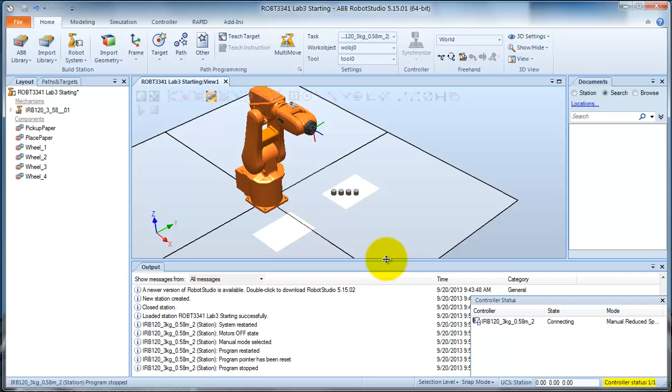We'll just have to wait a second here while it unpacks. And it's finished, we can close it. So here we have the station, got our controller status. We can close this one for now.

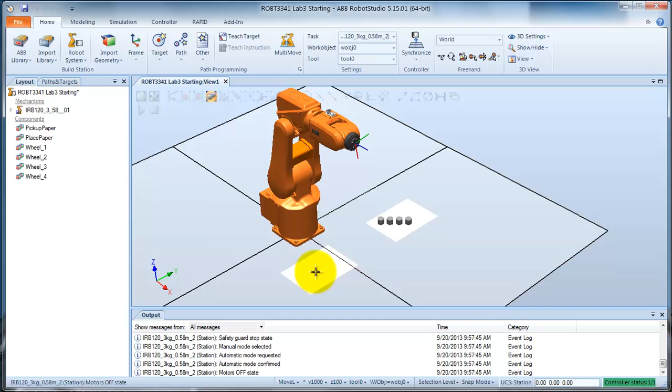And we've got two pieces of paper. They'll be supplied in the lab, 11 by 17 paper. On one, we're going to place the objects - these are the standard wheels or blocks that we're going to pick up. On the other one, we're going to pick them up from here, and then place them over here. They're in a linear pattern here, and we're going to place them in a circular pattern on this piece of paper. We're going to do a few things here.

We're going to start out by bringing in a gripper. So we have our gripper - I've defined a gripper for you already. So all you need to do is bring it in and attach it.

Then you'll create a couple of work objects. We're going to create one work object for this piece of paper for the pickup, and one work object over here for this piece of paper for the placement. After that, you'll create a few robot targets, and then you'll create a new program, and you'll write the rest of the program to perform the operations.

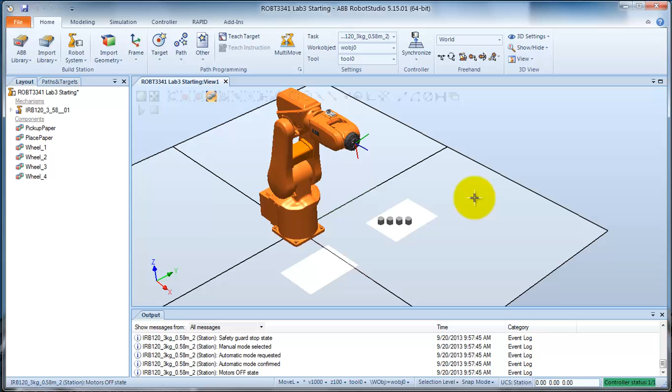We're also going to simulate the inputs and outputs, so I've created some simulated inputs and outputs for the gripper. We're going to start out by attaching, or opening and attaching, the gripper.

Notice all these tabs across here. We're going to be using several of them, mostly the Home tab. There's a second set of tabs here - there's a Layout tab and the Paths and Targets tab. We're going to be using both of those. We'll use the Simulation tab a little bit, the Controller tab a bit, and the Rapid tab a lot. So the Rapid and the Home tab are the main ones that we'll focus on in this lab.

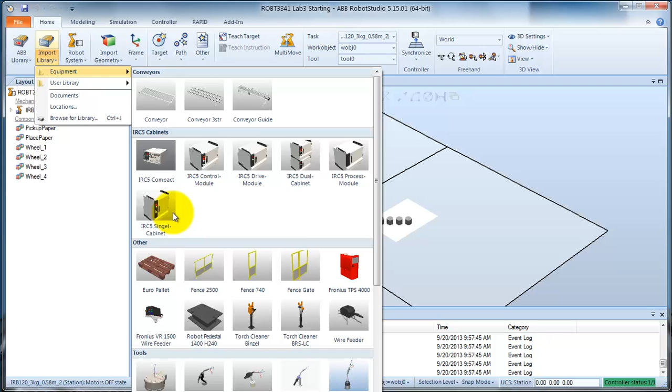Let's start out. I have created the gripper as a library component, so we come here and we'll browse for library. These are all the standard library components that come with RobotStudio, but I haven't placed mine in any of those folders - I've just given it to you. You've placed it in a folder. Find it - it's tgripper.rslib, so a RobotStudio library file.

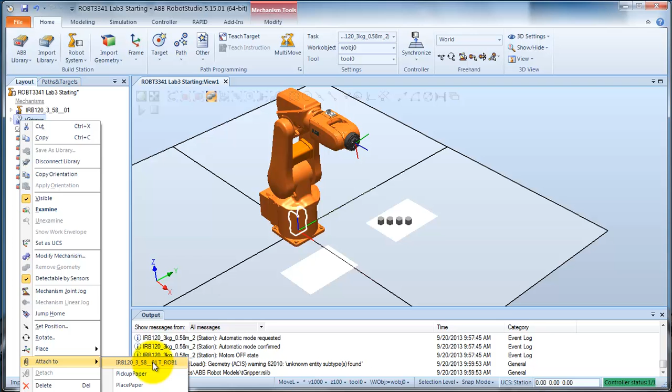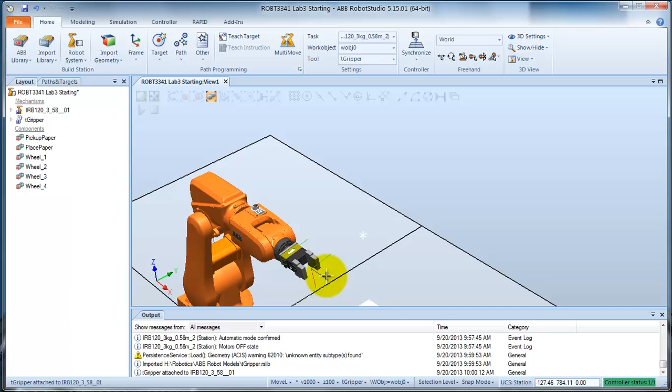Open that, and you probably can't see it because... there we go, it's hidden down there in the base of the robot. It comes in at its default position, but once we right click, attach to, we'll attach it to our robot, and we want to update the position - yes, and there we go. So now we have a Schunk gripper with gripper jaws that approximate our gripper, and the TCP is defined right at the end of the gripper jaws. Might not be the optimum place for it, we'll see later, but we can certainly work with that.

So after we have the gripper, then we're going to teach two work objects - like I said, one at the corner here of this paper and one at the corner over here on this piece of paper. There are several ways to create work objects. We don't really have to rotate them or do anything fancy here, so we can probably do it this way.

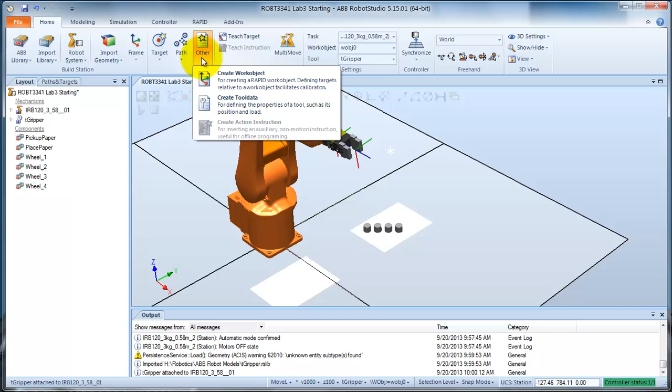We go to Other, Create Work Object, and we give it a name. So I'm going to call it WObj, let's see, Paper Pickup. And we'll make another one later called Paper Place. The user frame - so we'll change the user frame, we'll leave the object frame alone just like we did in the last lab.

So position and rotation, I'm just going to do the position. For values, if I click that, I have to enter the XYZ. Well, I don't know what the XYZ position is right now, so the easiest way for me to do it graphically is just snap to that corner.

So up here we have all the selections. I'm going to select surface selection because the white paper is a surface. Then I'm going to pick snap end for endpoints. After I've picked it, I can't just go and snap on the paper. I have to go and click back in the dialog box, so the cursor's in the dialog box.

Then I can go here, and you can see the dot appear there at the corner. It's snapping to the endpoint. So we'll snap at the endpoint. It gets the XY position. I can accept that. Now we've got our values in there, and I'll create the work object.

So we probably don't need to go back to this layout tab anymore. We can go to the paths and targets. Notice what's happened now. Under our task, we have tool data, T gripper. That's when I attach the gripper, then it attached that tool, and it defined that T gripper tool data as well.

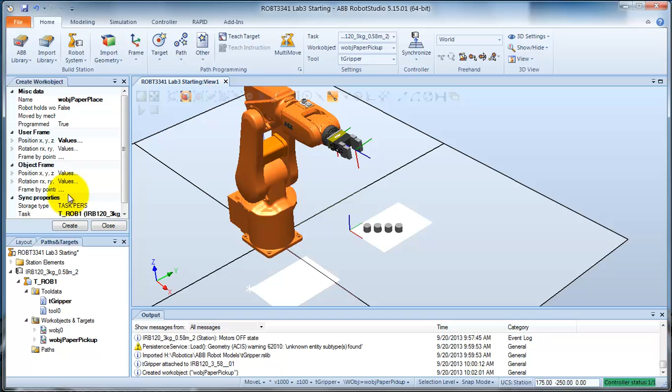So we've got our first work object. We want to create a second one here. We can do the same thing. Create work object, paper place, and click here, get our dialog box. We've still got the correct selection, so I just put my cursor in the dialog box, and I'm going to pick here. We'll accept that, create it, and now we have a work object paper place here.

Now we have to make sure that when we create points or targets later on that we have the correct work object and tool selected. So I'm going to start out by creating a target over here on this block. That's our first block that we're going to pick up. That's going to be with respect to work object paper pickup. So I better pick the correct work object here.

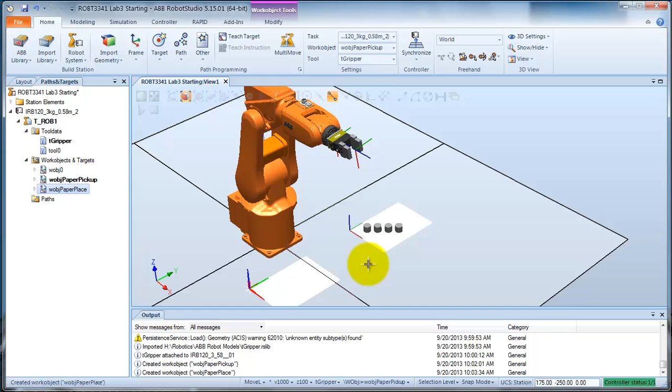All right, so let's go in here and create a target. And again, over here, we've got work object paper pickup. It's active. It's highlighted right now. So to create a target, we can create target, create a joint target, or create targets on edge. We won't be using those. Typically, the create target one is what we'll use here.

I've got on surface selection, I want to get the center of the block. So I'm going to pick snap center. Again, the focus is taken away from the position dialog, so I go click in here again, make sure the cursor's in there. And that's it. Point 1 has been added.

I can give it a name here, target name. Don't worry if you forget to do this, you can go and rename it in a minute. I'll show you how to do that. So we were using P for points, so we're going to go P first block, or you might come up with a better name.

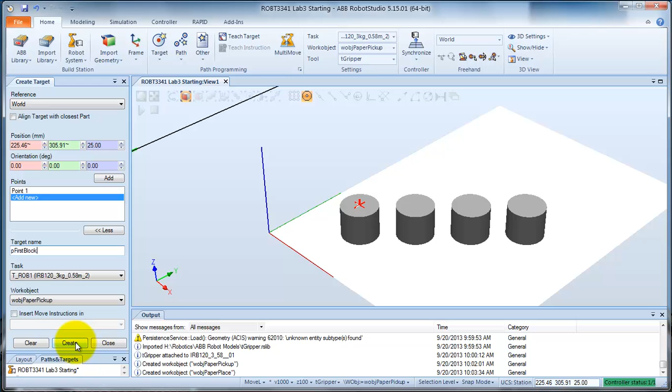We'll leave the orientation alone for a sec because I want to show you a few things about that. And we're just going to create that one. You can see I can create an insert move instruction immediately, so I can tell it create this target and a move instruction to this point, but we'll do that later on. So create that, close that, and let's see what we have here.

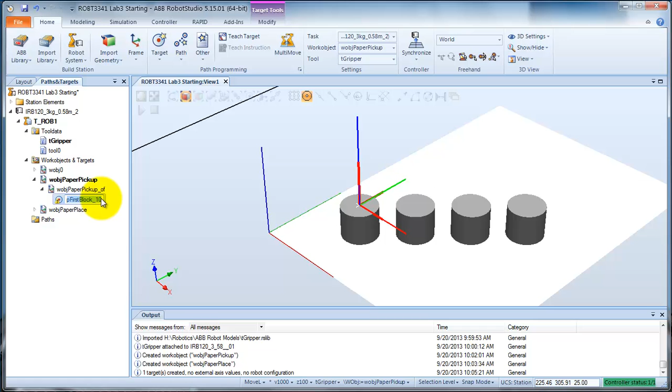We see here now we have P first block, and it puts an underscore 10 on it. We can rename that. In fact, I'm going to do that right now. Right click, rename, P first block.

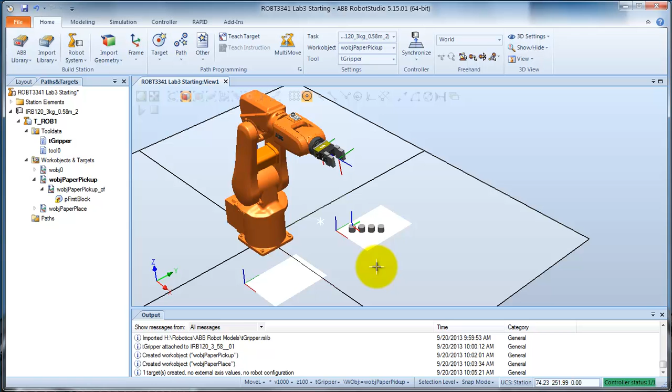So we've got a little warning here, the configuration is not verified. Because we're teaching it graphically rather than moving the robot to that location, it doesn't know what configuration the robot should have when it goes there. Remember, there are multiple configurations when we do the inverse kinematics.

We have to tell it which one to choose, meaning we have to give it a specific configuration. If I right click now and click on configurations, there are no valid configurations for that location. That means the robot cannot get there. Why not? Remember what happens when the robot moves to a location: it wants to align the tool axes with the target axes. There's no way it can align that z-axis with this z-axis because it would have to come up from underneath, and it can't get there.

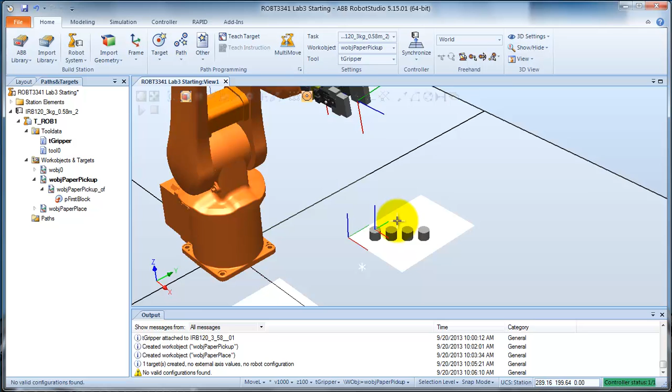So we need to rotate this target. We can rotate it about the x or y axes. Additionally, I'd like the gripper's green axis, the y axis, to point that way, so the gripper jaws are on either side of the part and we don't touch this part as we're picking up this one.

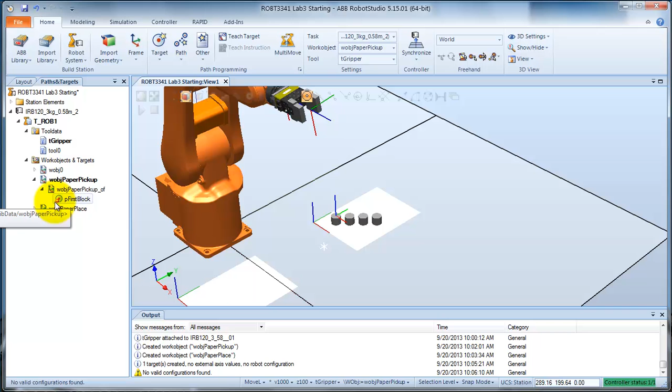Let's look at rotating this. I can right click, and notice we've got no configuration found here, we get this little red mark. So I'll go down to modify target, rotate, and notice we can move it, rotate it, place it using multiple points. I'm going to rotate first about the x-axis by 180 degrees and apply that.

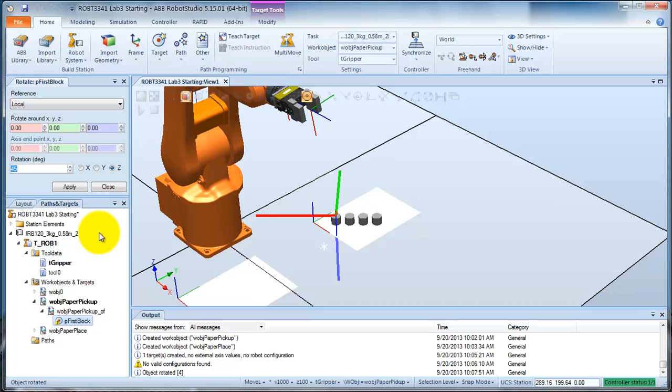Now the robot should be able to reach there. But I said I wanted this green y-axis to point out on an angle to match the angle of the blocks. So let's rotate about the z-axis, maybe 45 degrees at a time. No... no... and there we go, that's where I want it. So I can close that now.

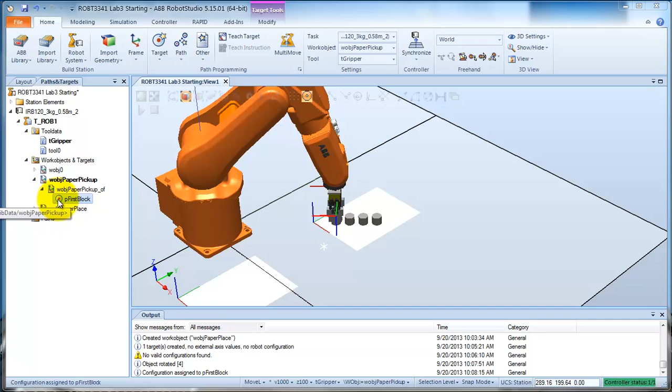Let's check the configuration now. Right click, configurations, and now we have one configuration only that's possible for that robot. Let's click on it and the robot will go there, and that looks fine. So if I apply that configuration, notice we're all fine, no errors. The robot can get there.

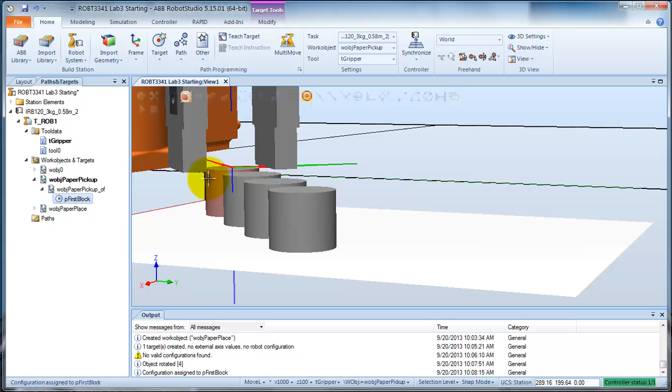Now you'll notice something else if I rotate around a little bit and zoom in: the TCP is now in line with the target. However, we're not far enough down. We could adjust this later in our program by just adjusting the Z value of the target, but we can do that here as well, graphically. So we want these jaws down a bit.

Let's say we want to move the target down about halfway here, maybe 12 to 15 millimeters, something like that. So let's move the target down. Right click, modify target, set position, and we want to go down in the positive Z direction, let's say 12 millimeters. And we'll apply that — you notice it's moved down.

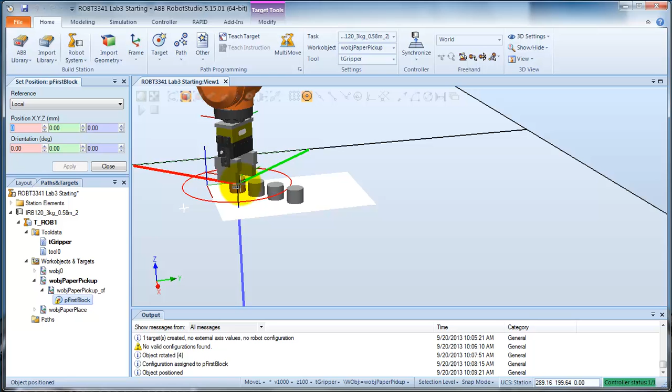And again we get the warning, so we have to right click, configurations. There we go. So anytime we move, rotate, or create a target, we have to make sure we select the correct configuration for the robot for that target. There are lots of tools you can use if you have multiple targets — you can copy the configuration so you don't have to do this for every single target.

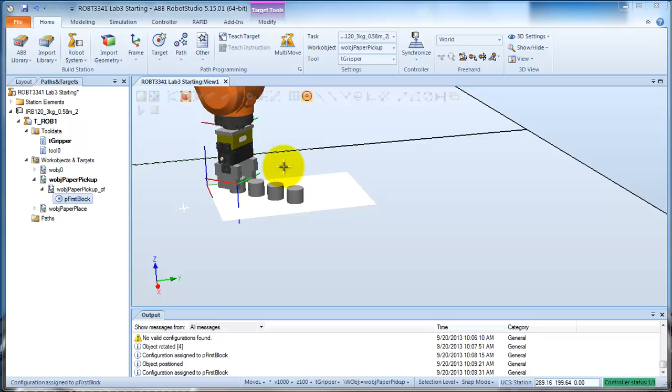So it looks like we've got a valid position now. What we can do is right click and add to new path. It creates path 10, which we can rename if we want. It puts a MoveL to pFirstBlock. That's not exactly what we'll want — we probably want an approach position ahead of that, and maybe a few other positions and things in there.

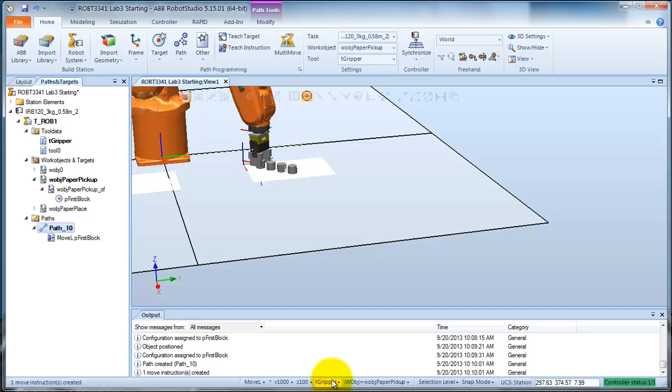But we can do all that later in our program. Notice it used a move L, and if I hover over it, it'll tell me the entire statement. It uses these settings at the bottom as the default, so if I wanted a joint interpolated move, I'd just pick move J from the list instead of move L. It also uses this work object and this gripper, which we can change here at the top under settings or down here on the status bar.

Let's just select another location — we'll call it kind of an intermediate point for the robot.

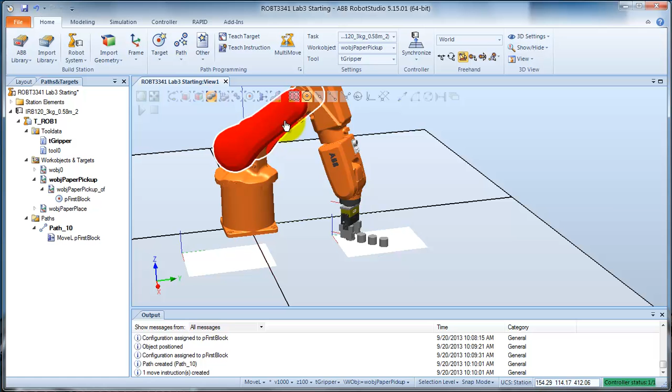And if I've got my robot, I can go in here. I can go to jog linear or I can go to jog joint, so I can grab individual joints of the robot. I can rotate it around. Maybe we'll zoom out a little bit.

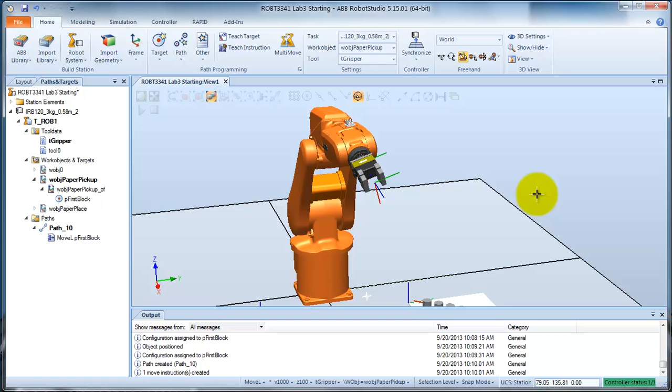Pull that one up, and somewhere there - we'll call that our intermediate point. So we'll pick, we'll come back to the intermediate point, and then we'll place, come back to the intermediate point, etc. So our robot's all in position here.

This one really isn't with respect to the object paper. I'm going to make it with respect to work object 0 instead. So if I move the paper around, this position doesn't really move.

And I can go and I can create a target, but the easiest way to do this one is probably teach target, or even teach instruction we can do. So you can see what it says for creating a move instruction and corresponding target at the current position of the robot. So let's do that.

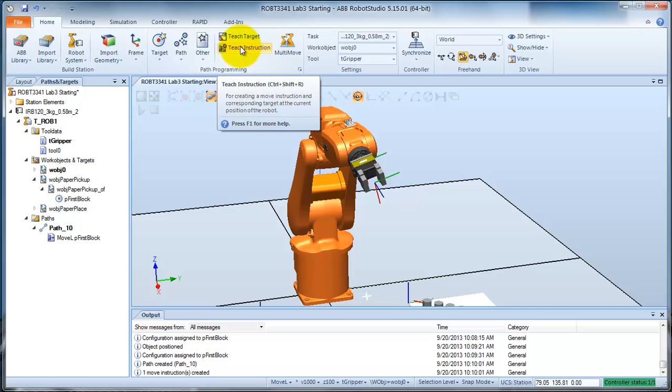It's giving me a little warning about work object 0. I'm okay with that. And you notice that it's put in move L target 10. So again, that's something we can go and change the name of later. In fact, I can do it right now.

We stored that one under work object 0. You notice that we have no configuration problems because I actually moved the robot there and said just teach where you're at with the current configuration. So I'll rename that and we'll call it a P intermediate. And you notice it renamed it automatically for us down here as well.

And I probably don't want to do a move L to it - I can change that later in my program quite easily. I can also do all sorts of things here and modify instruction. So instead of a motion type linear, I can go to a joint. I can change the speed here, the zone data. So let's say I'm going to go to a zone 20. Again, if you feel more comfortable, just type it in later on when you work with your program.

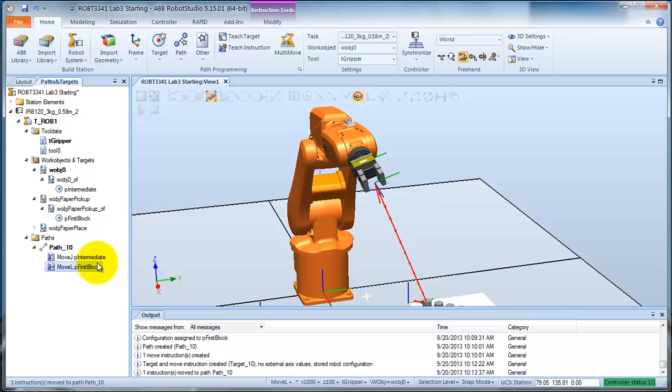So I apply that, I close it, and we've got a move J now. And we can move these around. So that one moves down to there. So I'm going to move to that one first, then down to there. And then I can copy that later when I write my program.

So once we're at this point, we've got a couple targets, we've got our work objects done, we've got some paths. And the reason I create those paths is I can't really copy these points over to my program unless I have them in a path.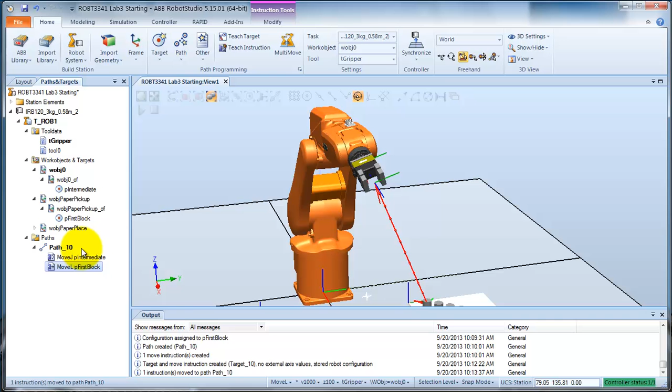So now I'm going to go over the Rapid tab. And there's many ways to create a new program. One way is to go under the task and we'll just right click and we'll click new module. I'll create a module and then inside that I'll create a main routine.

The other way you can do it if you want to try it this way is simulation setup. And I click entry point and I want a main procedure and I want to create it in - I've got my two existing system modules or my new module that I'm going to call Brent main module.

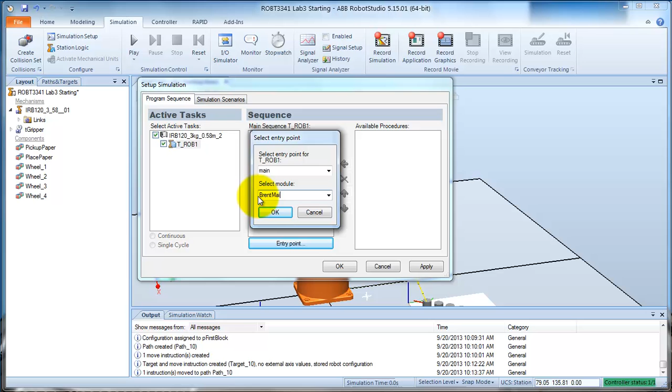And click OK. If we go to the Rapid tab, we'll see now I have a Brent main module. Double click on that and let's see what's in it. It should be empty, but it should have a main procedure already defined. So we're ready to go. We've got our proc main and we've got our main module.

Let's format that. There we go, that indents it nicely. So now I've got my empty program. And again, you can do this later if you want. It's just easier if you do it now because it helps you organize things so you don't have to reorganize them all later. Now on the synchronize button, we're going to synchronize to the virtual controller.

So all the work we had just done was in the station. Now we're going to synchronize to the virtual controller. This is going to send it to the virtual controller, which means that it's basically like the real robot, only it's the virtual robot and its controller.

It can be a little bit confusing until you get used to this sequence. It's asking where you want to store the gripper data, the work object data. It suggested making a new module called calib data for calibration data.

We say no, we don't want that. We want to put it in the Brent main module. If you want it all in your main module, you can do that. If you want it in the calibration module, that's a good place too. It keeps things organized. Where do you want path 10? Well, I'm going to put it in my main module.

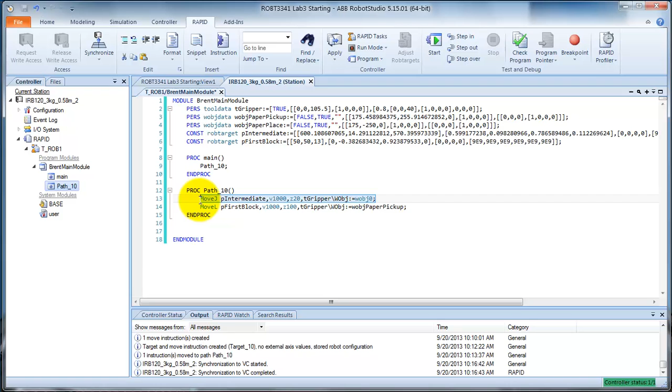What I'm going to do is Control C, Control V, take it back to intermediate afterwards. Of course, we'd probably want to put an approach point in here. Probably want to slow this down a little bit. This is probably going to be a fine. We want to use T gripper. Yes, yes. Everything else looks good.

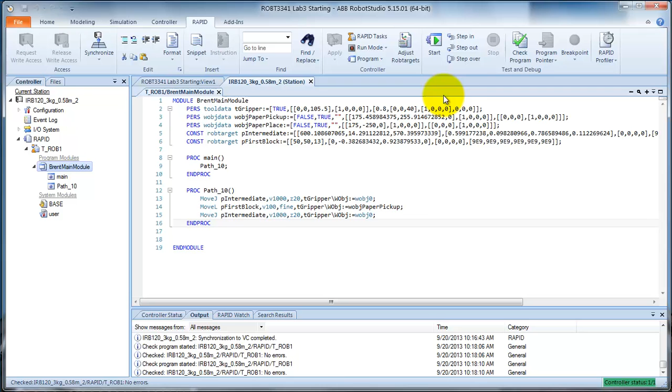Okay, so now we want to run it. Well, first of all, we apply our changes. And then we've got start up here. We've got check program — no errors, it says down here at the bottom. That's fine. We can put breakpoints in. We can do all kinds of things. As I showed you, we can format.

So I'm going to try to run it. Start, and it says not allowed command. Operation not allowed by the safety system. Please use the control panel to change to auto mode or verify that.

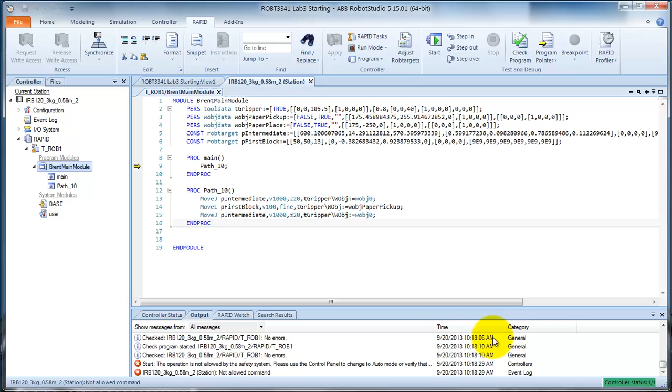So we got 2 choices here. We can either stay in manual mode, which means we have to run it from the teach pendant. We can do that because we know that we can look at the virtual flex pendant and run it just like we do in class. Remember, this is exactly the same as you do on the real robot. So I can show the virtual flex pendant, push the enable button, and then step through the program or run it from the flex pendant.

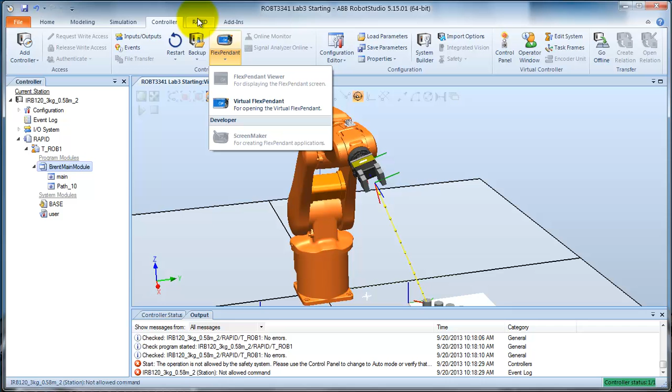In this case, though, what I'm going to do is put it in automatic mode and let it run in auto mode. So again, from the controller tab, I'm going to click on the control panel. This is the front panel of my controller. I'm in automatic mode, but the motors are off. I need to turn the motors on. Auto mode, motors on. Manual mode, auto mode, motors on. That panel can stay there if we like. I'll go back to rapid.

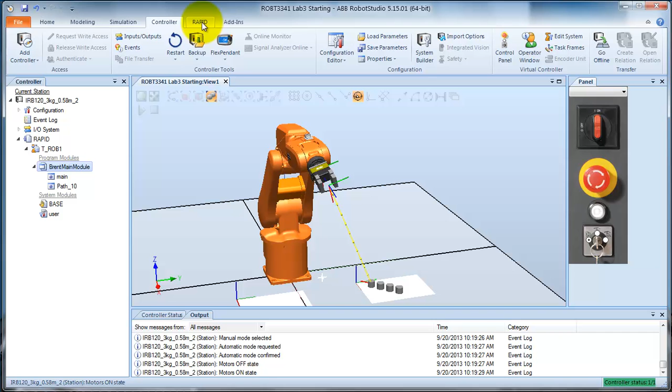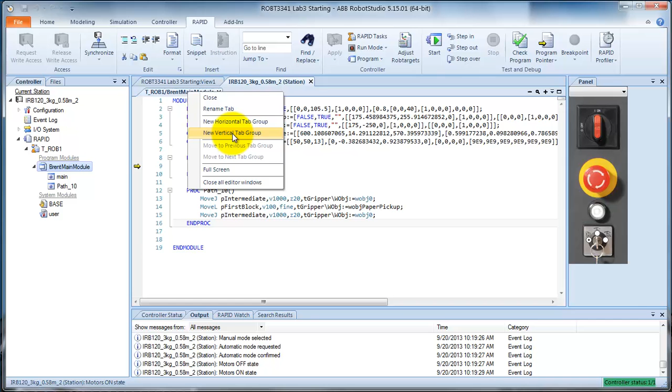I'd like to see the robot moving, so I right click on this tab right here, and I'm going to click new vertical tab group. And it'll show me my robot beside my program code. And now we should be able to start. And there's our robot executing our Move L to the first block, and our Move J back. So the Move L is really slow because I got a V100, and the Move J back is quick because I got a V1000.

You notice that it keeps doing it over and over and over. That's because we have our run mode set to continuous. So I'm going to change our run mode to single cycle.

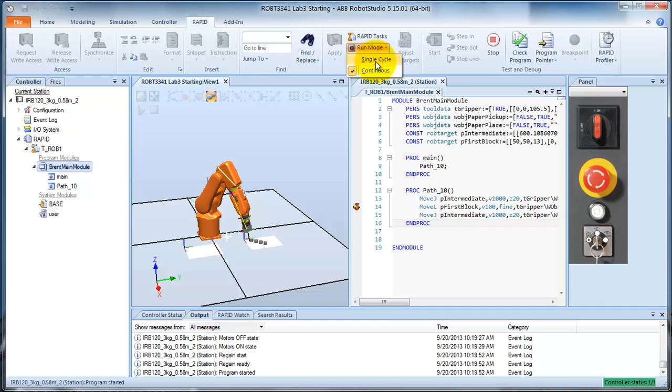Now it should stop at the end of the cycle. There we go. Okay, a few other interesting things here you can do just briefly before we finish up here.

So no problem there. We can step in, we can do one line at a time. We can put in breakpoints and stop at the breakpoint. We can change our program pointer, go to main in all tasks, which is typically what we want to do before we start running it. I can run it in manual mode from the flex pendant, everything that I can do on the real machine.

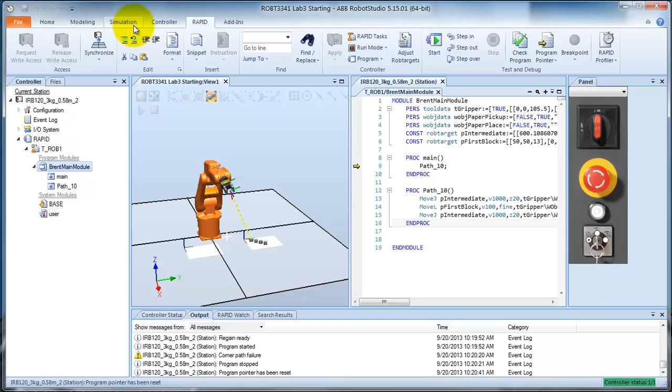A couple other cool things here. So simulation, I/O simulator, really neat. We've got a few I/Os defined. Outputs, we'll see these change if I turn the outputs on or off. Inputs, we can monitor inputs, and I'll show you that in a second.

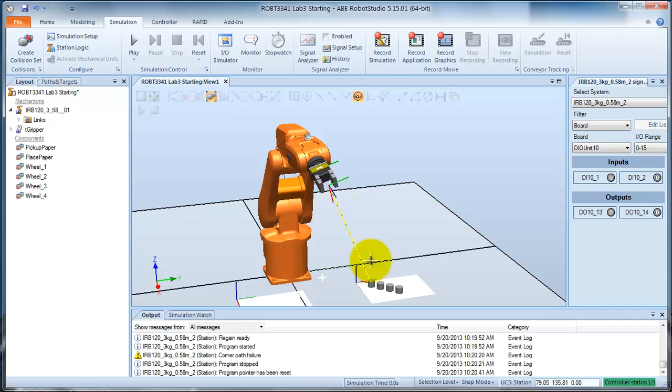We can also, under monitor, I can enable the TCP trace, and it'll show me the tool center point, and it'll leave it as a trace on the screen after we're finished. Back to Rapid. Now we've got lots of windows open, but a little bigger screen area, and it's no problem. So we're in automatic mode, we're ready to roll.

Okay, I'm going to throw a command in here. We'll move to the intermediate point, and before we go further, I'm going to do a wait DI, and I'm going to wait for, as soon as I press D, I get my choice, DI10 underscore 1, so input 1 to be a 1.

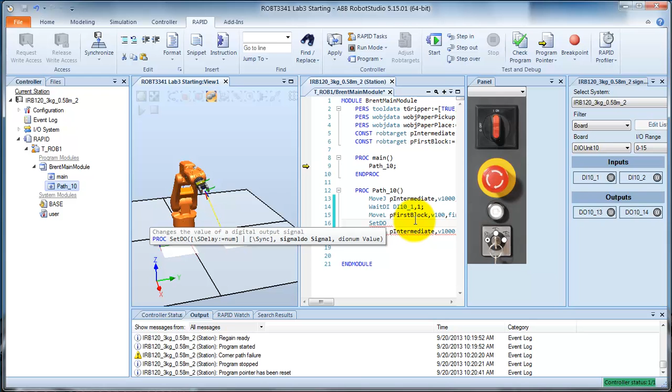And after, I'm going to set DO, space, press D. Okay, I'm going to set DO 13 to 1. So let's step through this now and see what happens.

Actually, let's just run it. So I'm going to apply, just like we do on the real one. Apply to save my changes. Start. What's it doing? It's waiting. Waiting for digital input 1 to be 1.

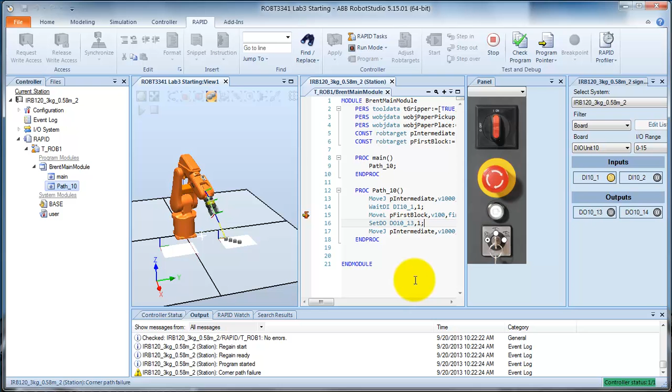So let's make it a 1. Let's simulate that switch being closed. There we go. Now it goes. After it's finished, that was fine, so it should get all the way there before it turns on the output, and it did.

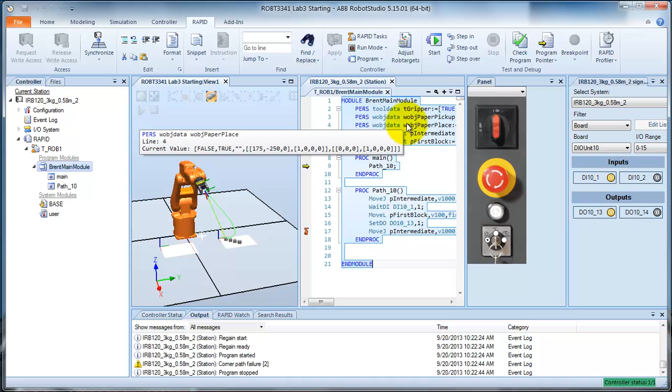So what I like to do here, just as one additional tip before we go, and notice the trace here, by the way. One additional tip: what I like to do, I like to copy, Control C, and paste it into Notepad or something else so that I always have a copy of it. Because as you go back and forth here, you might want to make some changes.

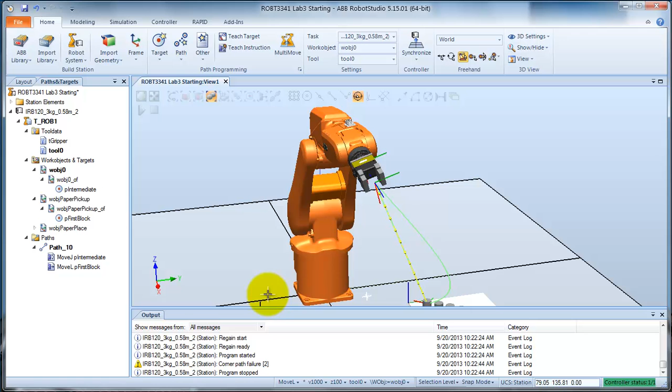You'll create some more targets. You want to add them in. When you synchronize here, changes you make here, you want to synchronize back to the station. The station is when you're in the Home tab and working in the graphical layout. This is the station. So when you're in here, either from the Rapid tab or from here, you want to synchronize when you make changes and make more points or change work objects, etc. You want to synchronize the virtual controller.

What can happen, and I've had this happen to me because, of course, we're all new at this, and it's easy to do, you'll overwrite what you've just done here. So that's why I like to have a copy of it in Notepad or somewhere else. So if I do accidentally overwrite it when I synchronize back and forth, I can always recall it and just paste it here again and keep working with it.

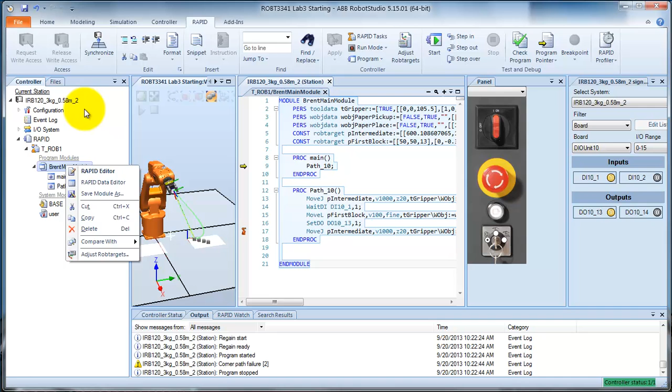At the very end, once you're all done, then what I've asked you to do is save your module, and I want to see your module with all your targets and your work objects and tool data definitions and all your program, of course. I want it nicely commented. And then as well, save your station, and then do a share and pack and go your station.

So you can pack standard libraries, do everything. So turn that one off so it does it. It doesn't not do it, so it does do it. So copy it, next, and you'll create the package, and that'll be an RSPAG file, and that's what I want you to submit along with the module files.